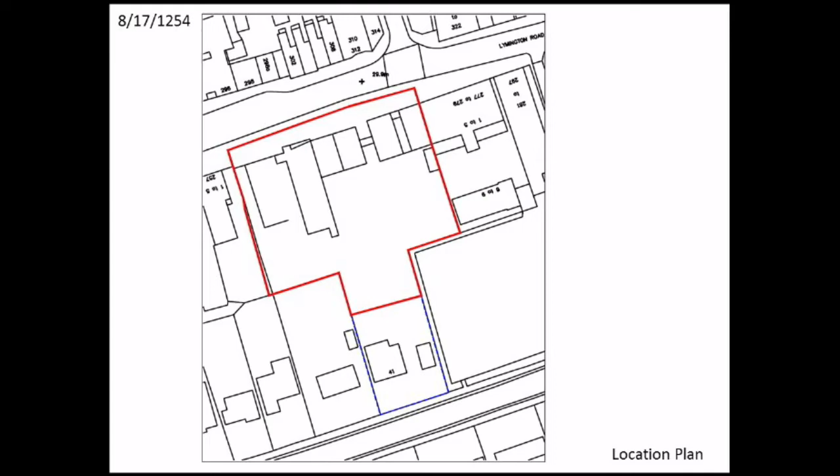To move on to the first item, this is an application for the redevelopment of this site on Lymington Road. Members who served on the committee before will be familiar with the site, as you've previously approved a scheme for its redevelopment before. You'll see the red line site there, with the northern part fronting onto Lymington Road and extending back to the rear of the property on Wortley Road.

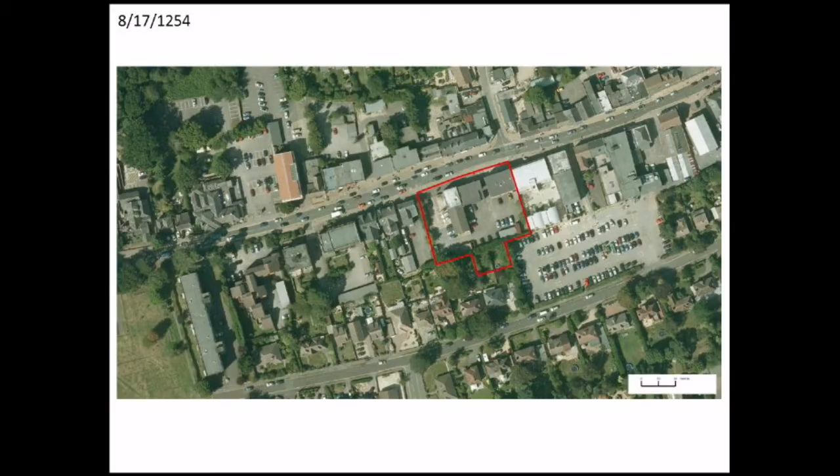The site lies in an area designated as primary retail shopping frontage in your adopted local plan, and just for your benefit, we've identified the area of the secondary shopping frontage further to the east.

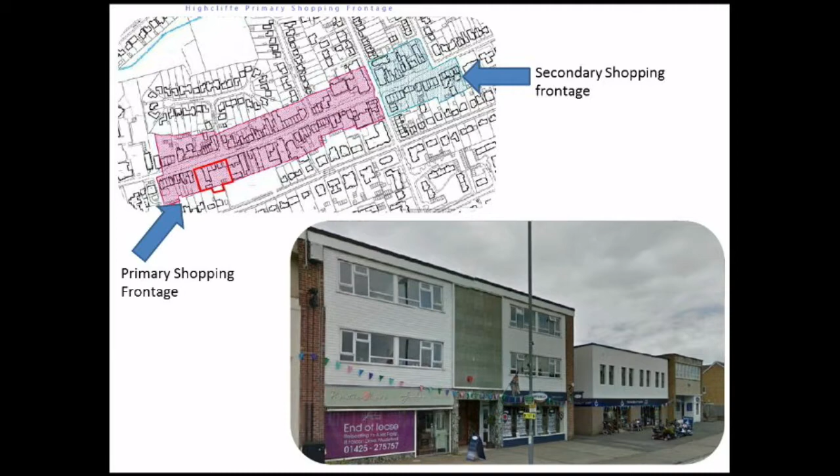These are surveys of the existing buildings on the site, and as I described at the start of the presentation, there's already a planning permission for the site. It includes development of 4 houses as part of that, this terrace of 3 units and a further detached unit that you're about to see.

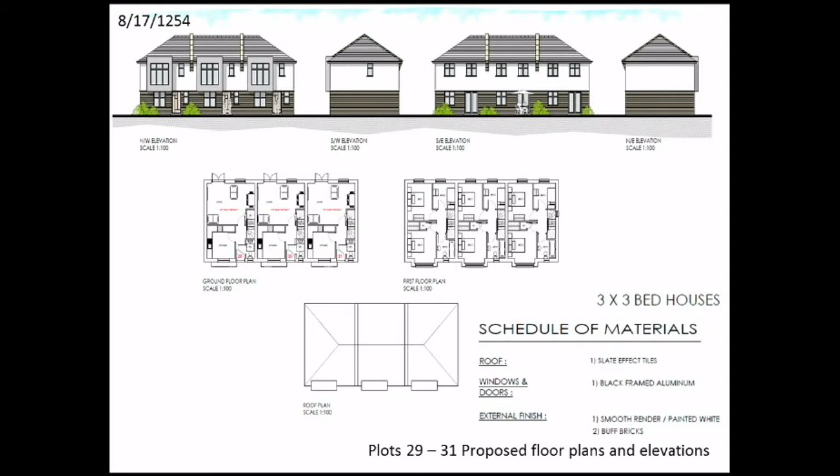This is the proposed layout. The layout is only marginally different from the approved layout. I'll show you the changes in a minute.

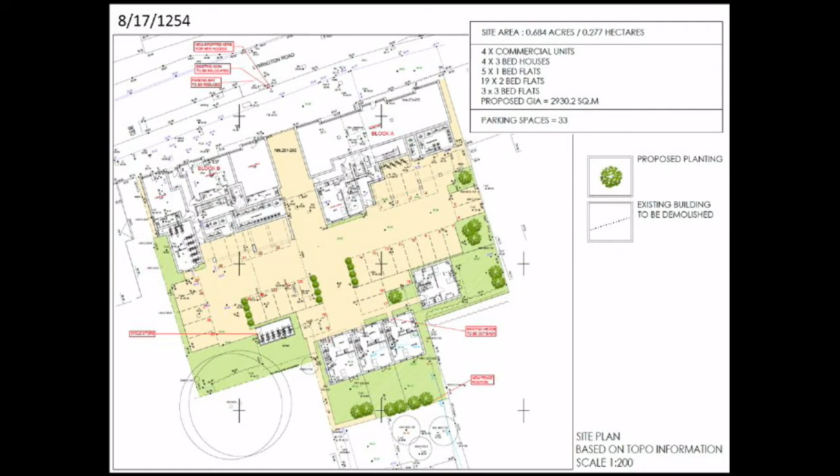In effect, what you can see are the main proposals for 2 blocks fronting Lymington Road with an access in the middle, with retail and flexible uses on the ground floor proposed and the residential uses above. And then at the south of the site, the proposed houses. The remainder of the site is given over to soft landscaping and car parking, with the bin and cycle stores that you can see on that layout.

This is just to show you the differences in layout between the two. They're largely the same. The main differences are in the southwest corner, bottom left, where you would have slightly less soft landscaping to accommodate the additional car parking as part of this scheme to serve the increased number of units proposed.

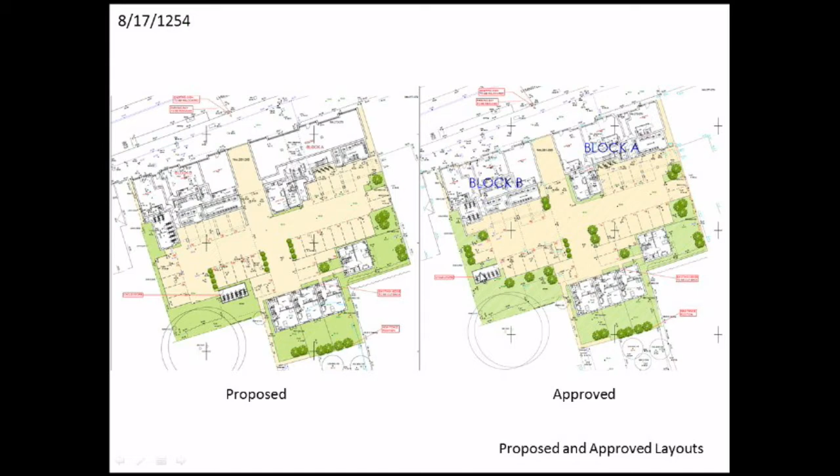Oh, excellent, thank you, help me to point.

So this is the proposed elevations as viewed from the Lymington Road. This is the main street scene, and you'll see how the development steps up into the centre of the site with the central access in between here.

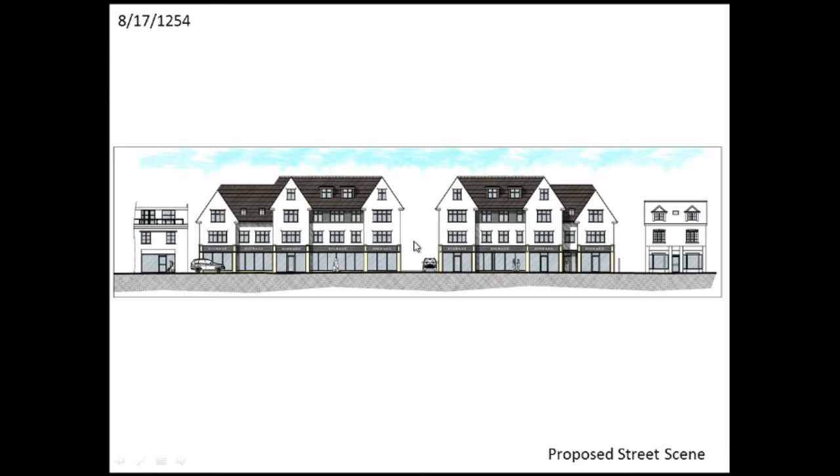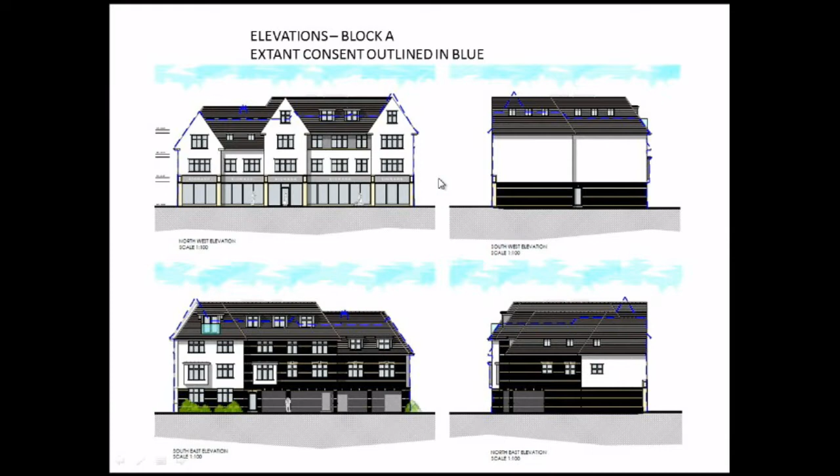On this plan, what we're showing you is the difference in the increase in scale. So the blue line that James is helpfully pointing to, that's the outline of the existing approval, and above that is the increased height of the building to accommodate the additional units proposed in this particular scheme. You can see that relates mainly to the centre of the buildings, but also includes additional height on the far ends.

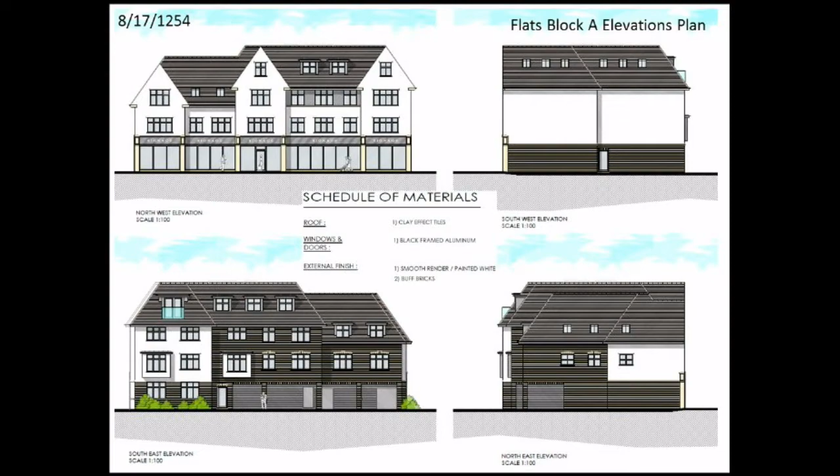In terms of the schedule of materials, this is similar to before, as you see listed there. These are the elevations you've seen in greater detail compared against the approved scheme shown here, and again with block B, what you're considering now against the existing approval.

This is your floor plan. The main difference with the scheme in relation to here is the proposal to turn this from 3 individual units to a single unit, and also the applicant seeking a flexible permission in this case for A1 retail, A2 financial professional services, and A3 cafe use in this larger unit.

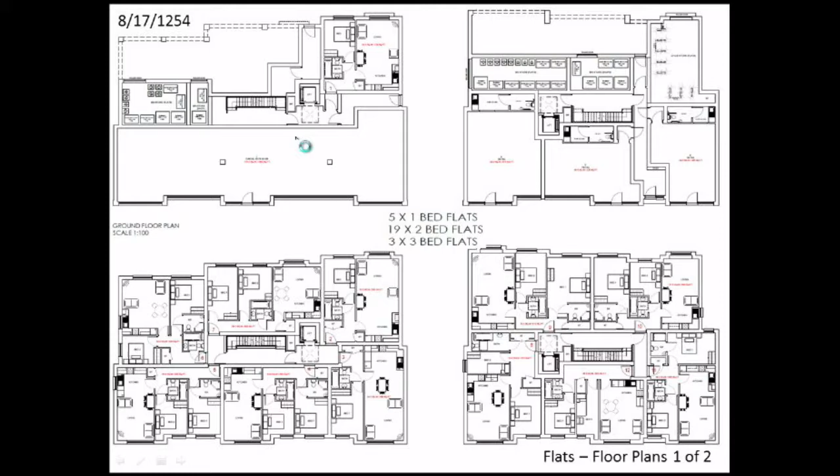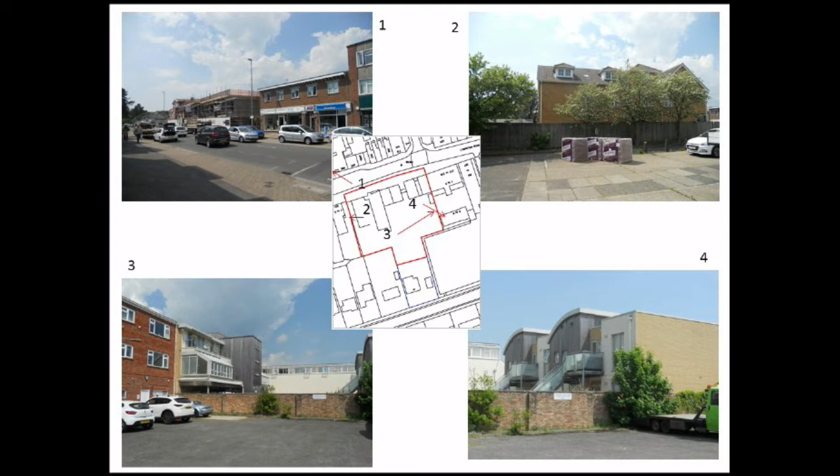Here's your layout further up, so you can see the flats arranged on the various floors and up to the 3rd floor level in the higher part of the building in the centre of the site. So taking you to some views, this is the view with your back to the site, with the new development under construction opposite.

View 2 is from an existing block of flats which has a view into the site from the southeastern end. Southwestern end—this is view 3, looking towards a more modern block that's been built just beyond the car park along the boundary of the site.

Views 3 and 4 show that, and then this is the far end of the site where you can see the existing buildings which project back from Lymington Road, and the large area of hard standing and garages. View 3 shows you the rear boundary towards Wortley Road.

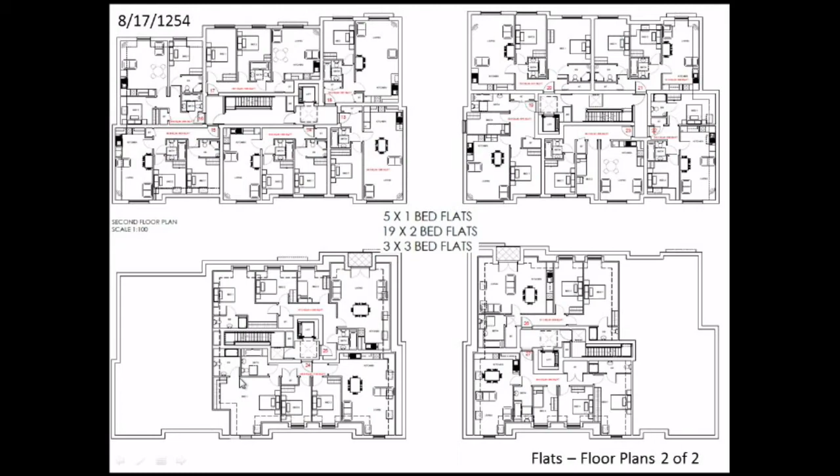You'll see from the report we've given due consideration to the impacts this may have in terms of the street scene and also on neighbours' living conditions. In this instance, we're satisfied that the scheme continues to comply with the relevant development management policies in your local plan, and recommend the application for approval accordingly.

Just as a note on the update sheet, you'll see the recommendation is to delegate to the Head of Planning to approve, subject to completion of a Section 106 agreement. In particular, that agreement concerns inserting an overage clause so that if there is a delay in implementation, the applicants will submit a further viability assessment.

We've accepted, following advice from our viability assessors, that in this instance the scheme isn't sufficiently viable to deliver the affordable housing. But if there is a delay in implementing the scheme, we've inserted a clause into the legal agreement so we can revisit that.

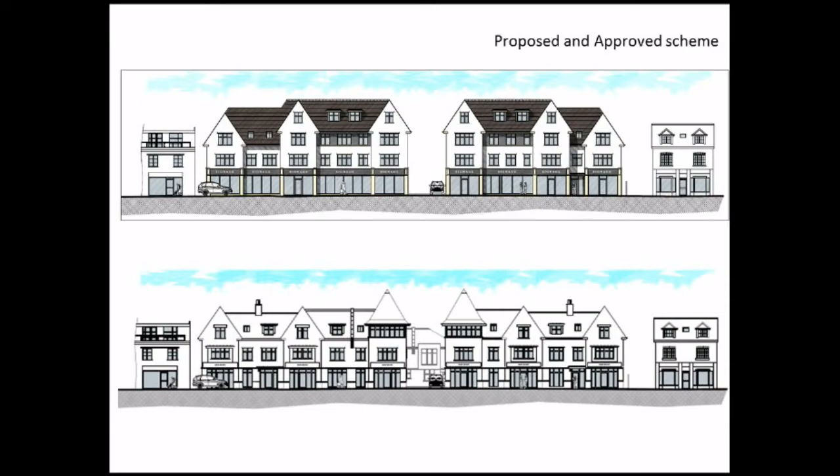So, Chair, the recommendation is as on the report: to delegate to the Head of Planning to approve, subject to completion of that agreement and the conditions listed in the recommendation, Chair.

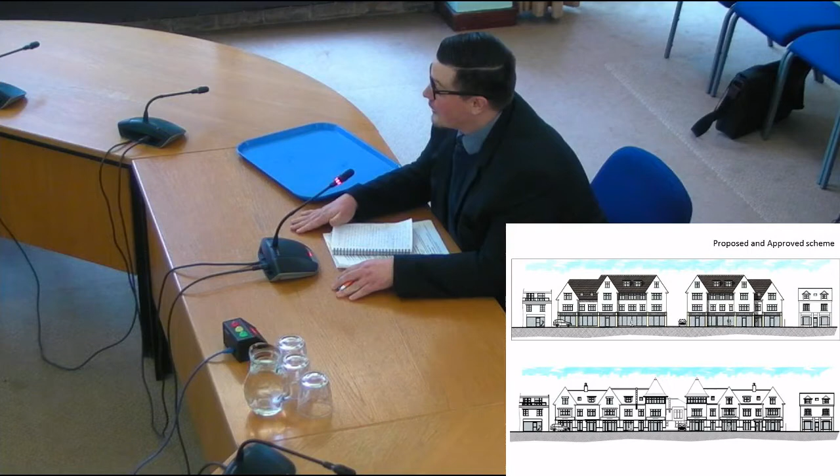My name's Adam Bennett, Town Planning Consultant at Ken Parke Planning Consultants, and I represent the applicant in this matter. The scheme before you today is the result of positive and proactive negotiations between the applicant and officers, with all of the issues here having been resolved at an early stage.

The application has been in a position where officers have been happy with it for some time, but there's been considerable negotiation in respect to the Section 106 agreement, which has delayed this coming before you. The recommendation before you now is to approve, subject to completion of the 106 agreement, which I support.

Members will recall approving the previous application for this site at committee in December 2016. The development now proposed is a subtle revision of this earlier scheme, which increases the number of flatted units to 27 from the approved 23.

The commercial units at ground floor remain, however 3 of those smaller units have been combined into one larger flexible unit. The dwellings at the rear of the site, as Mr. Hodges pointed out, remain exactly the same as per the approved scheme.

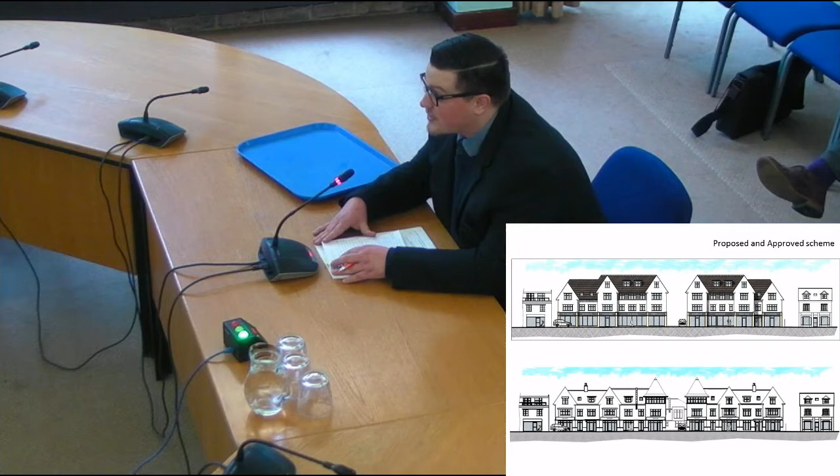To accommodate the additional flatted units, there is a modest increase in the height of both of the street-fronting blocks to 4 storeys. This, however, steps down to 3 storeys at both ends of the site, where it abuts 259 and 277 Lymington Road respectively.

To provide for this additional increase in the number of flats, the on-site parking provision has also increased to 33 spaces from 30, which both your officers and Dorset County Council have confirmed is more than acceptable to meet the needs of this development. Whilst the proposals result in some additional massing within the street scene compared with the earlier approval, the same design ethos remains.

The buildings step up towards the centre of the site, providing a greater vertical emphasis and reducing any sense of horizontal dominance which results from the general width of these buildings. The increase in roof height to accommodate the additional storey is modest, which also helps to mitigate this presence. We consider the scheme to be a visual improvement to the earlier approval, and the development still represents a very high quality addition to the street scene in replacement of the existing rather banal buildings on the site.

Your officers completely agree with this sentiment. There's no change in the separation distances from the neighbouring properties resulting from the additional massing, and the limited number of additional window openings proposed are not considered to give rise to any loss of privacy or harm, as officers have confirmed. There are also no objections or concerns raised by consultees on any of the technical matters here.

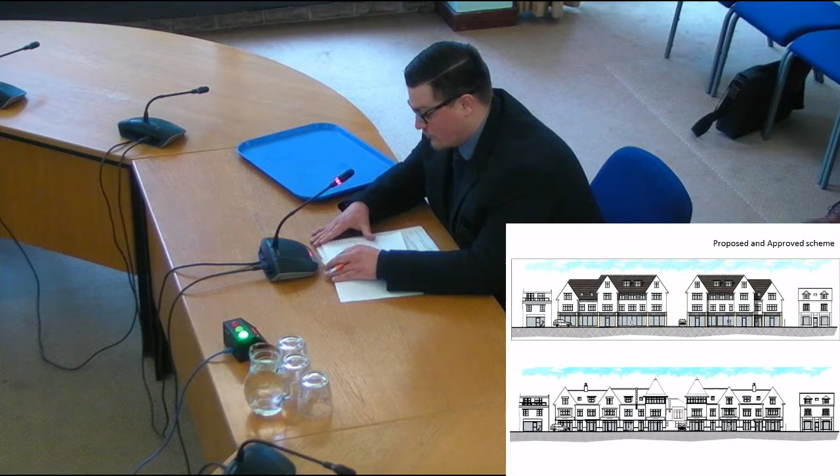The scheme will deliver much needed new housing in a sustainable location and new commercial units which will enhance vitality and viability of the district centre in a high quality, well considered development. We ask therefore you vote in accordance with the recommendation of your officers. Thank you very much.

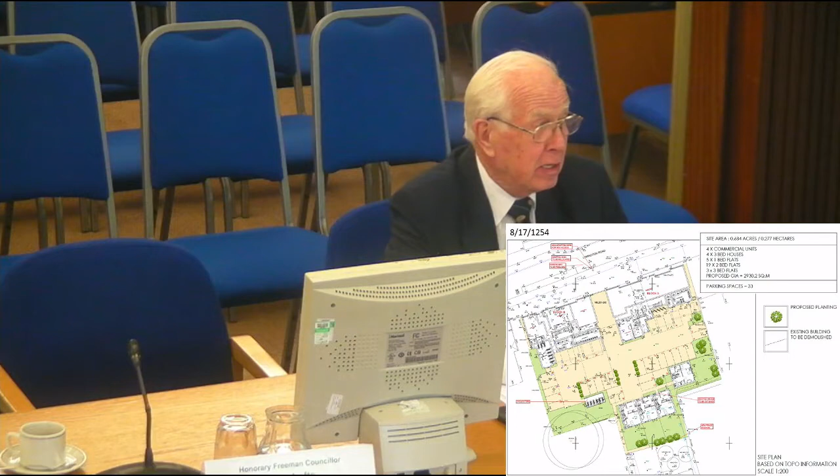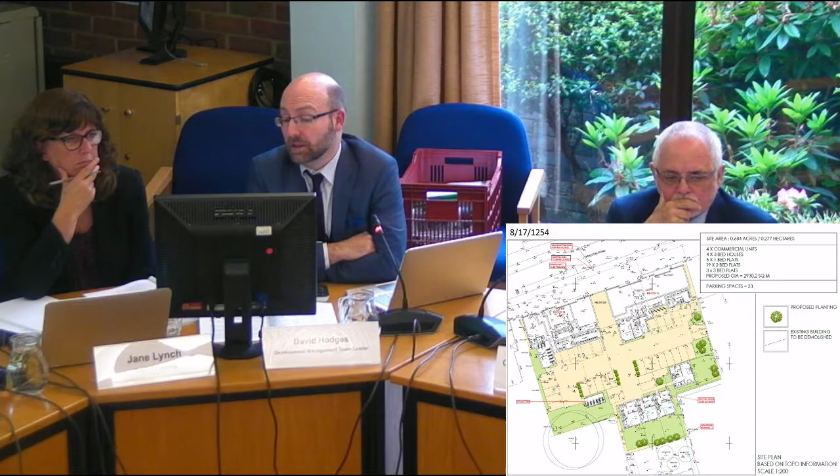Yes, Chair. We've considered that against the criteria in the adopted Dorset parking guidelines, and also taken advice from the Highways Authority. We'd also recognise that this is a very convenient and sustainable location in the middle of Highcliffe. In the absence of any concerns raised by the Highways Authority, we would recommend that that parking level is acceptable, Chair.

Councillor Spittle. Thank you, Madam Chairman. I see actually that the new scheme is proposing 4 stories, including the ground floor, whereas it was my memory that I thought we only had a 3 story limit. Could you explain how the 4th story is being recommended?

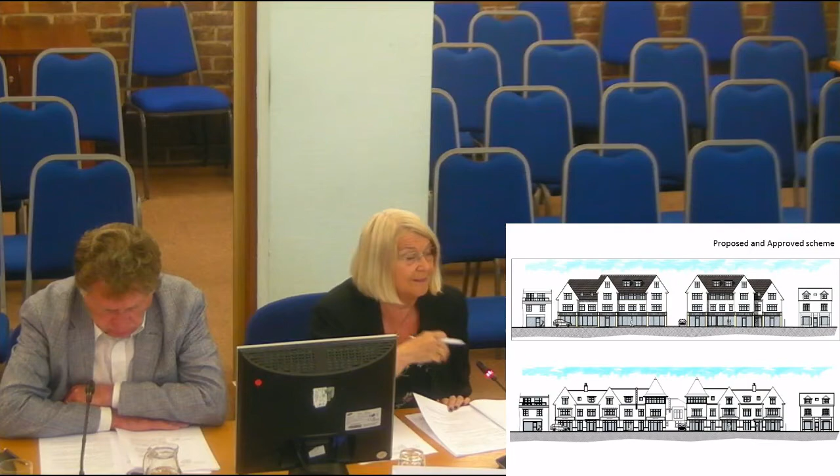Chair, it's important to consider these applications on their merits and whether the impacts of the increased height are compatible with that broader street scene along the Lymington Road. We've given due thought to that, and we don't have a policy which rules that out, so we have to consider it on its merits. We've looked at the comparison between the actual overall increase in height, which is fairly limited when you look at the two together. The other issue is that the 4th storey is mostly within the roof space, so it reads as a 3 to 3.5 storey scale. We've looked at that within the context of the quite tall buildings surrounding it. We don't feel that's so out of keeping, so out of character, that it's detrimental or harmful to the street scene on Lymington Road, Chair.

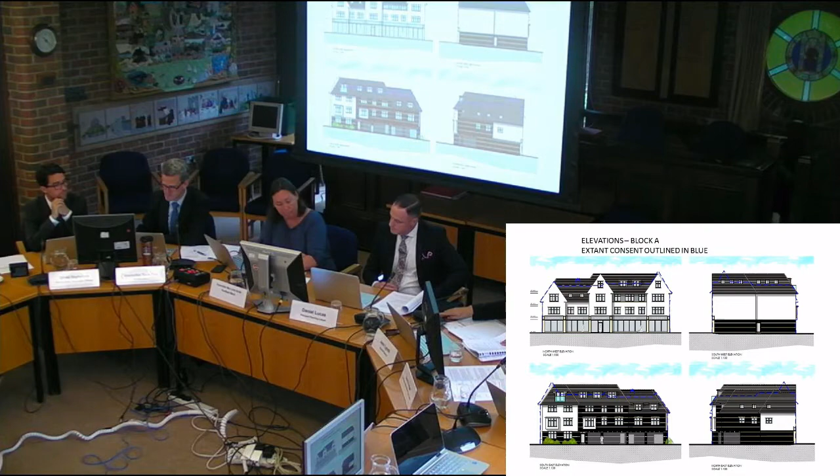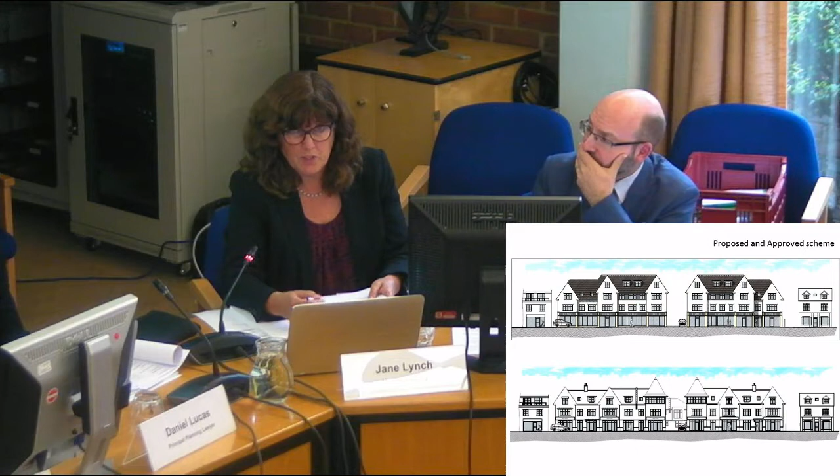If I could just add to that, the National Planning Policy Framework at paragraph 58 also advises that we need to optimise the potential of the site to accommodate development. In terms of any concerns members may have about how this fits in the street scene, paragraph 65 states that local planning authorities should not refuse planning permission for buildings which promote high levels of sustainability because of concerns about incompatibility with an existing townscape if those concerns have been mitigated by good design. So there is support for a building of this type, which officers have assessed as being acceptable in this location.

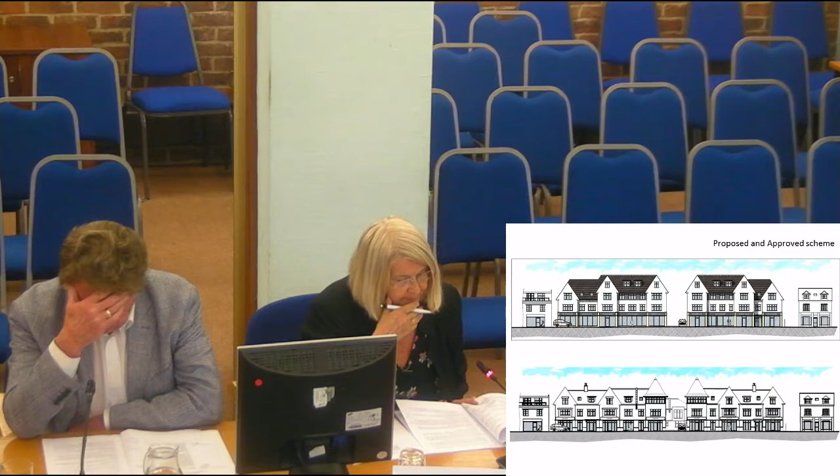Did you want to come back on that? Yes. Thank you for that information. Whilst I accept what you're saying, are you then saying that there are other properties in the high street that are of a similar height? Or is this only going to be the first? So is it going to be setting a precedent?

I think there's two parts to that. First, in terms of the precedent, each time you get a proposal, you need to consider it on its merits. When you consider the heights and scales of the buildings either side, what you're getting is a gradual step up in the scale of those buildings. We don't feel that's so out of keeping, so harmful, that it warrants refusal of the whole scheme. If you get a proposal elsewhere for a 3 to 4 storey scale development, you'll need to look at that in its context and on its merits. But ultimately, the approval of this isn't the first step to it appearing everywhere along that particular stretch. It's the wide frontage of that site that allows some scope to go up in height, we feel, in this particular instance.

Sorry to dominate the scene.

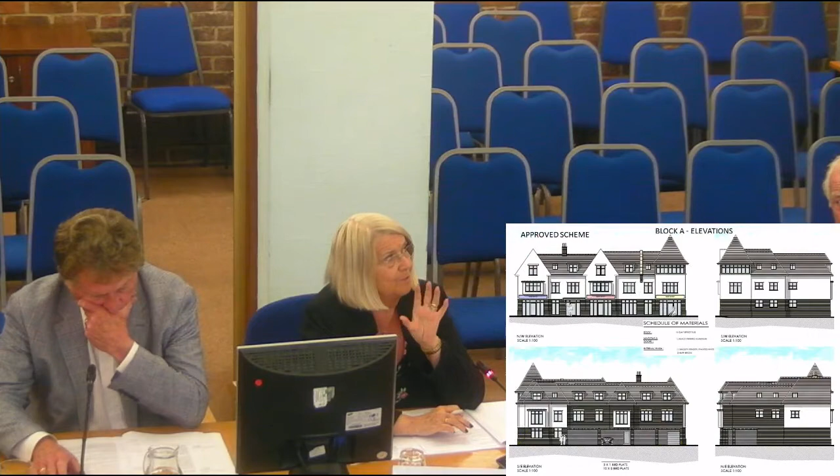So, bearing in mind what you have said, is it possible to have a condition that the additional elevation, which I notice is 2 metres or equivalent to possibly 6.5 feet, would only apply to the high street as opposed to other places within the area? Because there's always been a large amount of concern about retaining just the 3-story limit. Thank you.

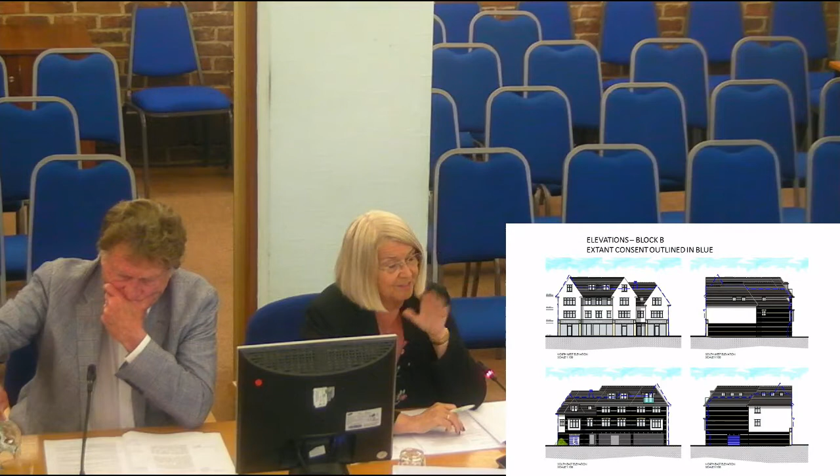Unfortunately, I don't think we can do that. Every application has to be looked at on its own merit, and therefore anything else that came before us with 4 stories, we would be able to make the decision as and when that came before us. We have no policy stating how many stories we will have in that area, and therefore there is nothing to back up that condition.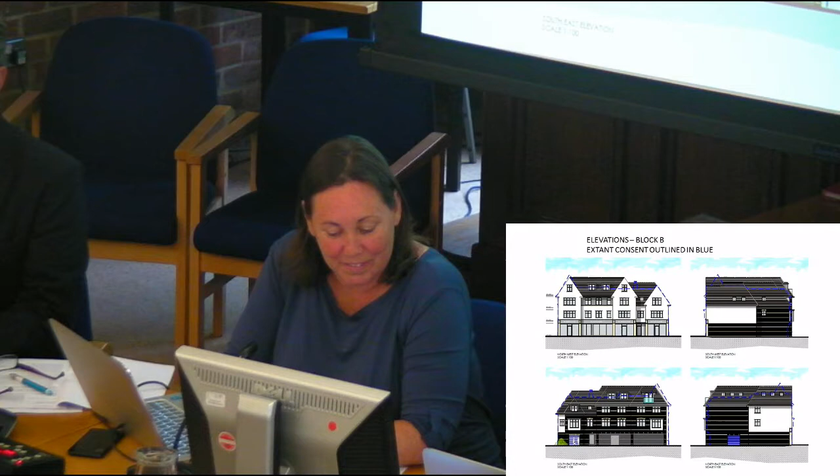Councillor Nottage. Thank you, Mr. Chairman. Can I thank you for the update sheet as well? I noticed this is...

By way of a question for the future: the viability assessment has shown that the development of the site cannot support contribution to provision of affordable housing. I think at some time or other the planning committee should know a little bit more about the assessments that contribute to those decisions. I know that's been verified and agreed by the district valuer, but for my part I'd like to know a little bit more about what does and what does not contribute to affordable housing.

I also note that the condition the applicant has agreed is that if construction doesn't reach a shell and core stage within 2 years of the date, that viability report can be reassessed. Am I right in saying that most of the left-hand side of this building is under construction as we speak?

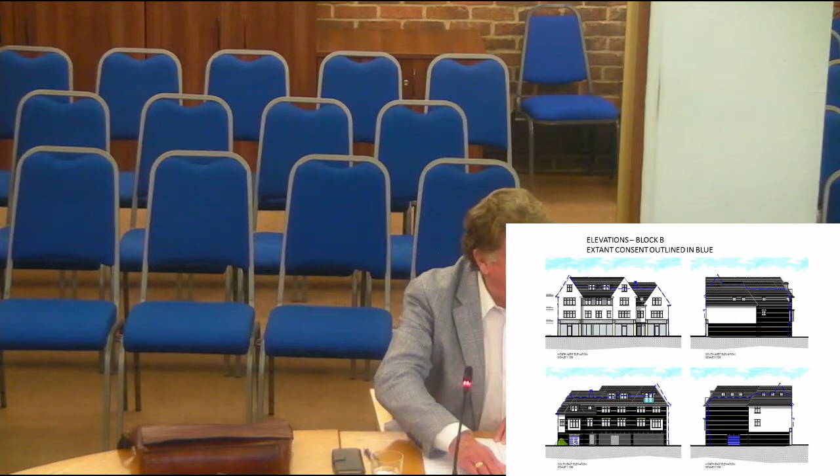No, it isn't. I think you're thinking of the construction on the other side of the road, which is not dissimilar in design. Oh, I see. I apologise. I withdraw my question.

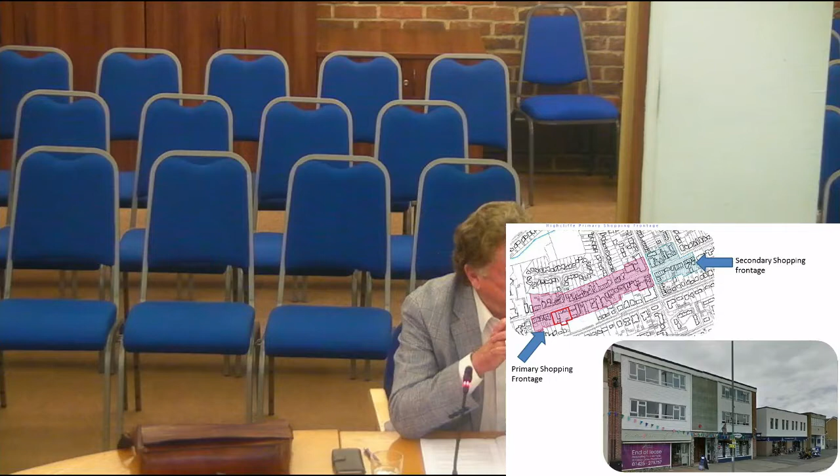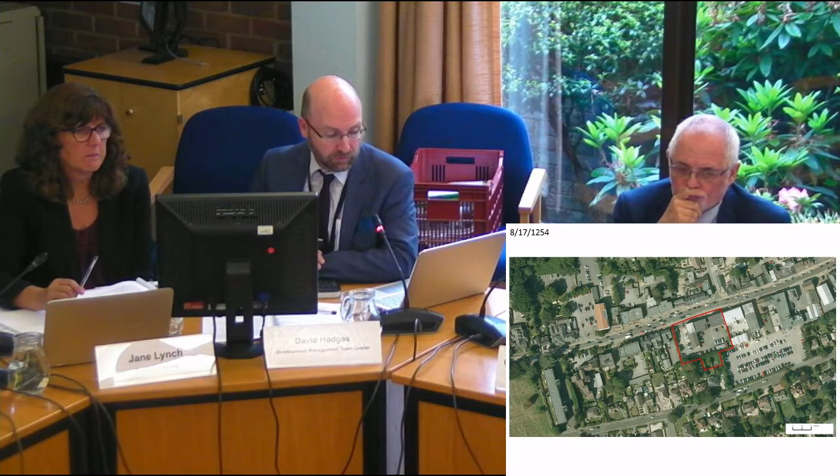Chair, yes, so the question about viability, we set out in some detail in the report the discussions about viability. Our understanding is the government, as part of the proposals of changes to the NPPF and the government white paper, is looking at establishing some principles for the publicity of information in relation to viability assessments and how they should be carried out. We're waiting in the summer for the government to publish those, when they're actually going to set out on a very clear footing how they should be considered, the information that council should publish.

For the purposes of this information, we receive a report from the developer stating they're concerned about the viability of the scheme. We give that to the district valuer as an independent assessment, so we've got an independent view of the veracity of the information we're being given. We're satisfied with the information from the DV as a reliable interrogation of that case by the applicant, such that we have confidence in it, and we can say to you we have confidence in the DV's assessment. So if the district valuer says there isn't a case to argue over viability, we would relay that as our position and recommend that you have confidence in that assessment from the DV as well.

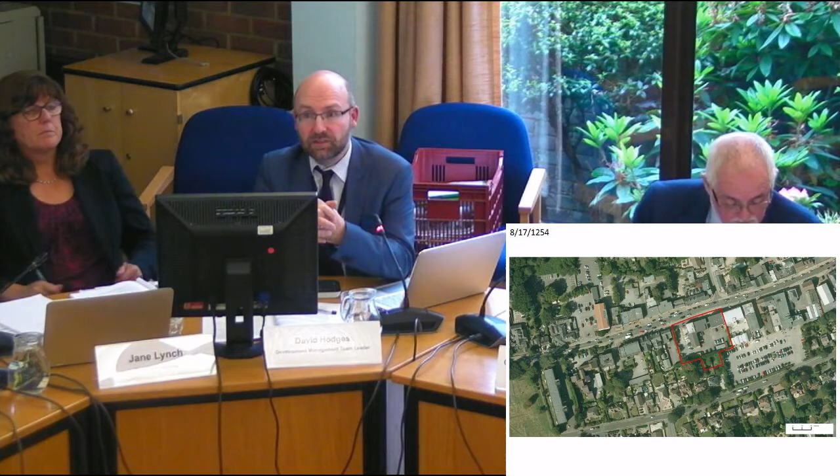In terms of the information submitted, whether you're being allowed to view that will depend on whether there's any commercially sensitive information within that submission. Does that help?

Well, thank you for that. I suppose the question I would ask is just how far would you go in allowing us to understand the principle of affordable housing, which is quite crucial to our plans as far as the council is concerned?

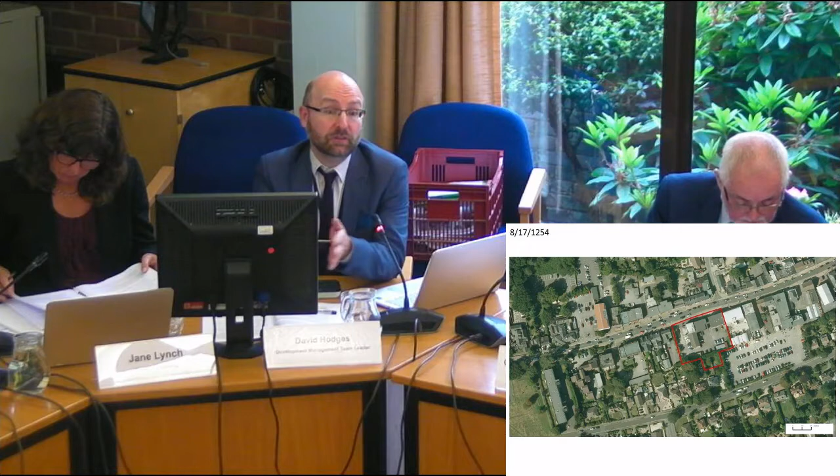Yeah, Chair. I mean, we've got a policy. We're trying to deliver affordable housing as part of that policy, and we don't give up that easily. But we are constrained by the way the system is currently set up, where if the applicant puts forward the necessary information that is accepted by our independent assessor to show the scheme isn't viable, we don't have much ground to resist the scheme for not providing affordable housing, because in effect we'd be fighting an appeal case we couldn't win. So we don't want to do that.

What's important to us is to interrogate those developments to find out whether they are sufficiently viable to deliver affordable housing. Some will, and unfortunately some won't, as the system is set up currently. This is one of the ones in which, after the district valuers looked at all that information in relation to the cost of the development, the likely return to a reasonable investor, and the likely sale and rental values of the commercial unit, their conclusion in this particular instance is it's not sufficiently viable. We don't want to be in that position each time, but if that's presented to us as fact, and it's accepted by the independent assessor, then we would have to accept that as overwhelming evidence that in this instance it can't provide affordable housing.

Did you want to come in? Oh, apologies, yes, just to add in terms of what the policy states. The policy states at LN3 that any planning application which on financial viability grounds proposes a lower level of affordable housing than required by the policy percentage requirement, which is 40%, must be accompanied by clear and robust evidence that will be subject to verification. So they've given us the robust evidence, and we've gone to verification by using the district valuer. In this instance, it's a case that complies with that policy still because we've tested whether it's sufficiently viable or not. I hope that makes sense.

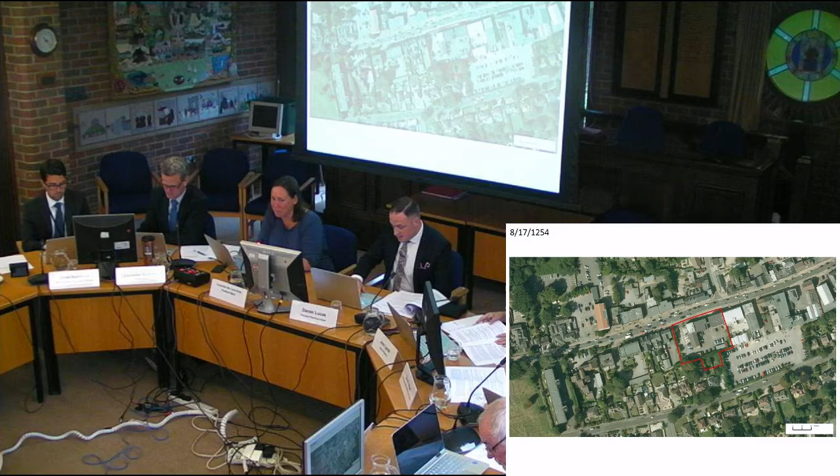I have a question. The larger retail unit, is there an end user for that at the moment? Because it is quite a large unit. We've not been advised of that. That's not our role as the planning authority to say either way who should go in there. What we're doing is considering it in the wider scope of the vitality and viability of the high street there, in terms of whether allowing that A1, A2 or A3 use would then contribute to the vitality and viability of the high street of Lymington Road at that point. So that's our concern. We've not been advised of an end user.

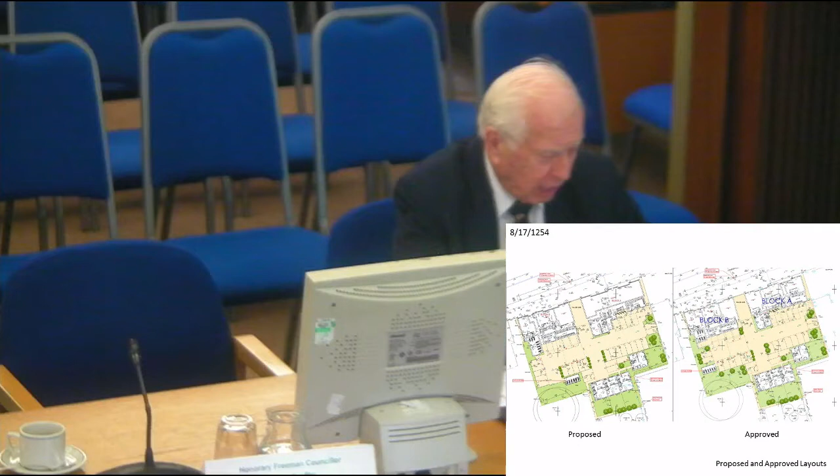Councillor Hall: Very much, Madam Chairman. I think Councillor Notch has made a very valuable point. It's all very well saying we need affordable housing, but there's a lot of difference between social housing and affordable housing. Affordable, I understand, is only 80% of the market value, which, in my opinion, is very high. Would you agree with that?

We can't really agree with it because affordable housing is just an alternative term for social housing. The split that we have is between socially rented and shared ownership. You're right about the discounted values, but I don't think this is the place to get into the values of those. We have a policy which, if affordable housing was applicable on this site, we would be applying, and we would be reporting to you how the offer sat against our policy requirements. But affordable and social housing is the same thing.

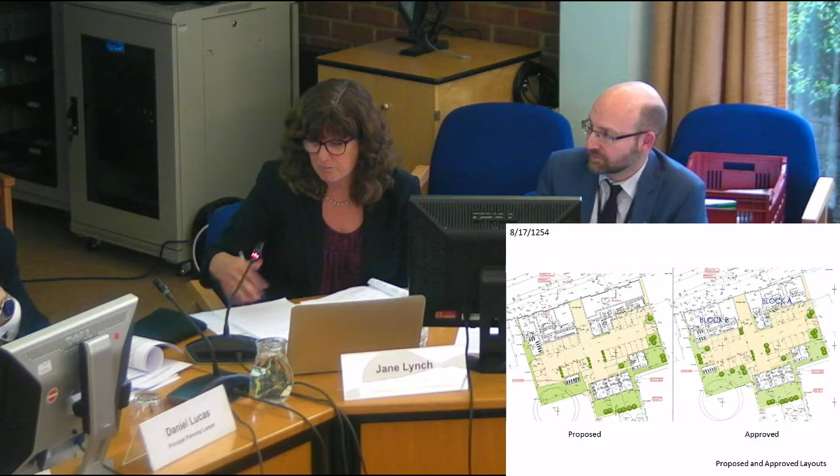Any further questions? Councillor Neale: Yes, point 7.6, the trees. There's a contradiction in some of the comments there about the benefit of the screening to the flats behind. I don't see in the conditions that you've actually put in a condition about replanting any of the trees that you remove.

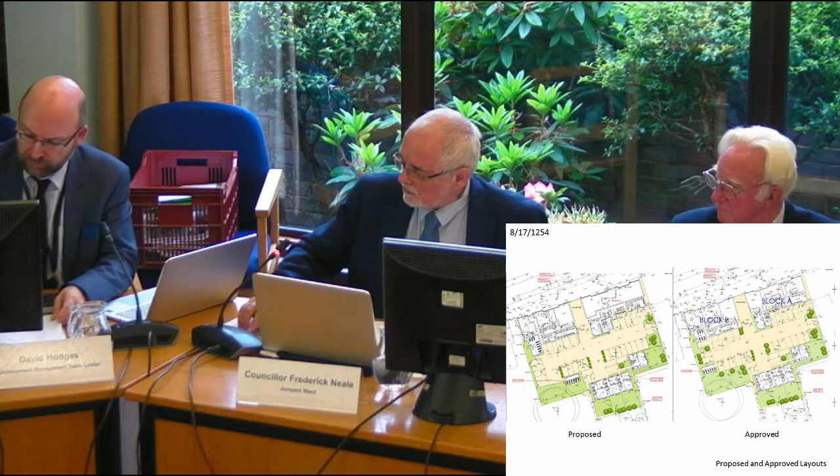Chair, bear with me one second. So at condition... Chair, that's correct, and if members were sufficiently concerned about that, we would be content to add a landscaping scheme just to ensure the quality of the scheme reflected the layout you see before you on the screen. I think if you follow it down, points T1, T5, you carry on saying there's a negative impact to the flats behind, so I would like some screening put in as a condition. I think at condition number 11, it actually talks about protecting the trees and their rooting environments once groundwork starts, so maybe we could look at extending that to cover all of the landscape.

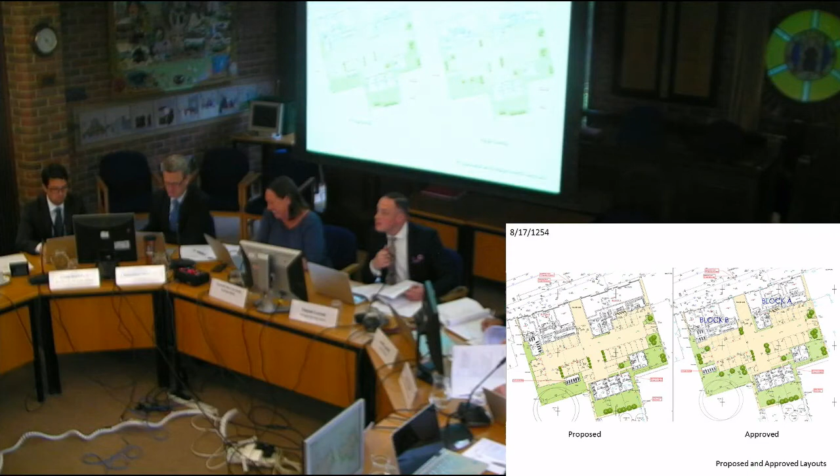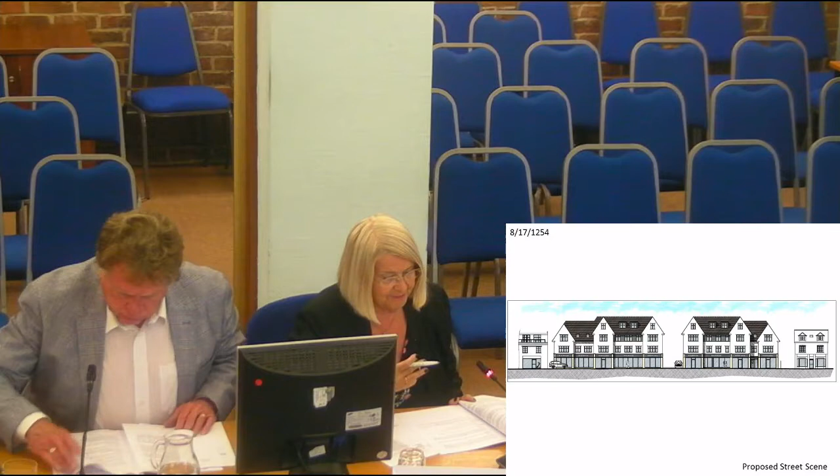Any further questions? Councillor Spittle: I'm sorry to come back about the height again. Well, I'm not really, but I was just apologising to appear nice. I see on one of the conditions, number 15, that you have referred to the general permitted development order, but as I read it, that only seems to be related to retail use. Am I right? Or does it also mean that permitted development rights are going to be removed for the development of the properties that will be inhabited, not the commercial use?

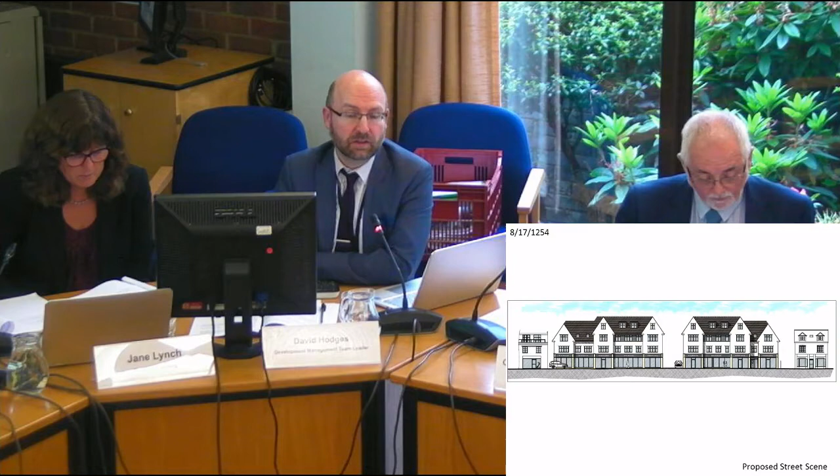Chair, yes, if I can help explain. Condition 15 is only concerned with the use of the retail unit. The reason for condition 15 is we want to retain those uses in A1 retail. Under the permitted development regulations, they can be changed to other A uses without needing planning permission. So we want to retain the retail benefit.

There aren't any further conditions relating to removal of PD rights because these are flats and they don't benefit from any PD rights. So in effect, they can't extend or insert any further windows into the block.

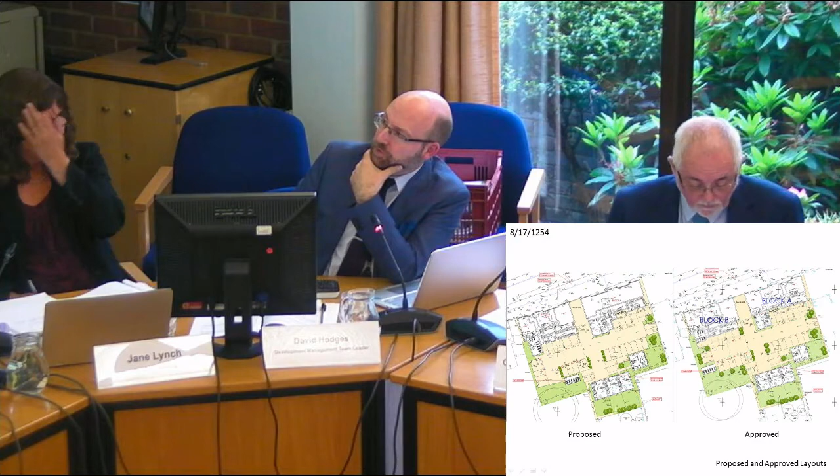In terms of the houses at the back, you could consider that, but I don't think there would be an overriding reason to remove the permitted development rights for these houses, due to the fact that they've got reasonable grounds and gardens, and we don't necessarily want to be dealing with applications for sheds at these properties when they could just put them up as permitted development. Also, our experience is that inspectors take a very dim view of us uniformly removing permitted development rights where there isn't an overriding need to do so.

So the flats here can't alter without coming back to us. We considered whether we should restrict those rights to add outbuildings or alterations, but we feel in this particular instance there's not an overriding reason to remove their PD rights, Chair.

Are you happy with that, Councillor Spittle? No.

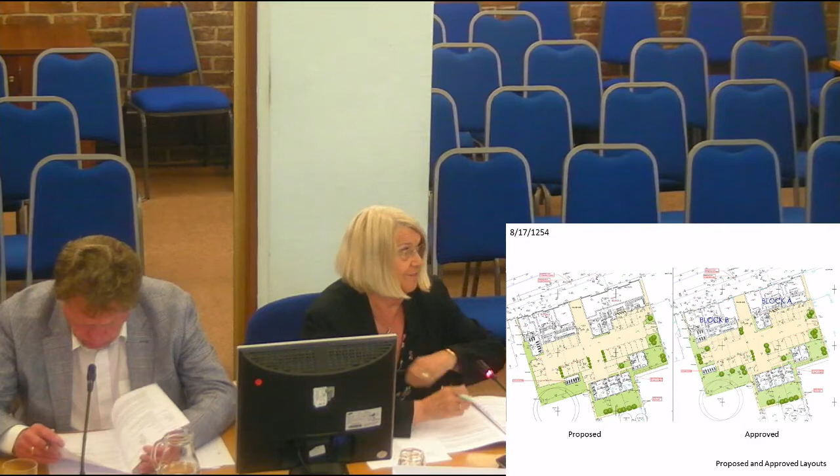Could we see, please, the plans for the houses, just to satisfy myself how many? So they're only going to be two. Yeah, no, in fact that satisfies me. Actually, I was afraid they were going to be of the same height as the shops and the frontage. Thank you, and I should have looked at that a little bit more closely.

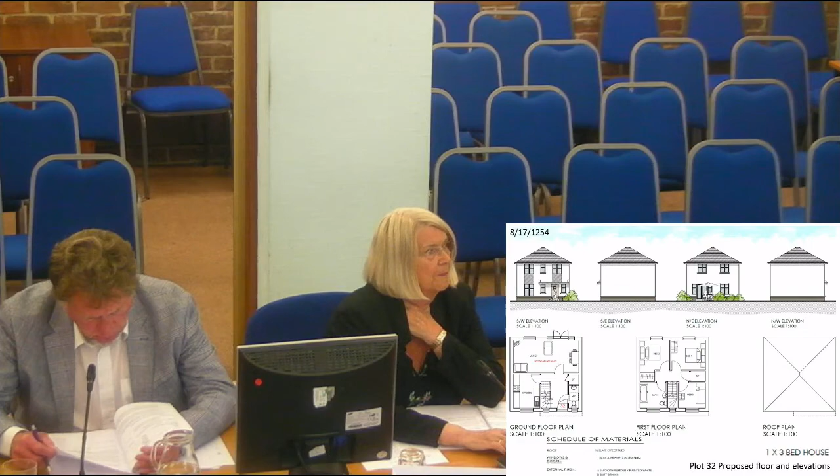Thank you. Do we have any further questions before we go into debate? In that case, we shall go into debate. And who would like to start me off? Vice Chairman?

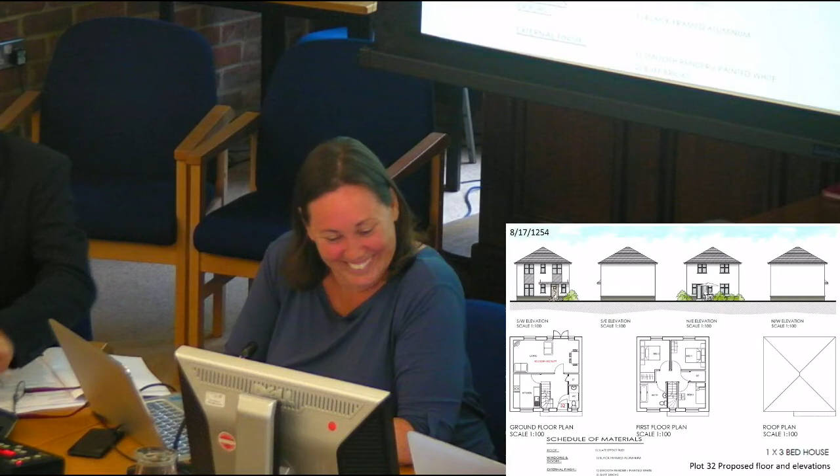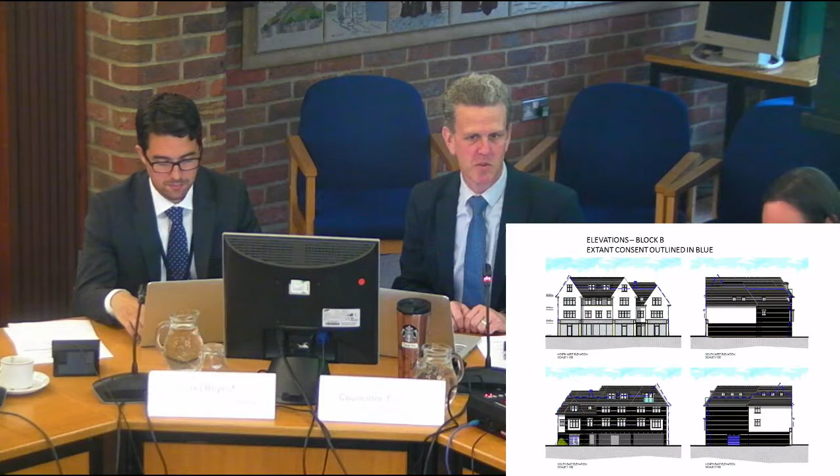Thank you, too kind. Okay, as the design champion hat comes with the job of Vice Chairman, I just want to say that I do remember the previous development coming through to us, and I remember thinking that I quite liked the design, and I have to say that I find the new design to be not quite so appealing.

However, that said, we don't have any reasons that I can see that we could turn this down. So I'm happy to propose, as set out with the recommendation there, to extend condition 11 to include the screening. Okay, do I have a seconder for that?

Councillor Grace: I'm happy to second this. I also agree with Councillor Fox, I prefer the first design of these buildings, but as we have no planning reasons to refuse, I will second.

Do we have any further debate? Councillor Hall: Thank you, Madam Chairman. Well, unfortunately, I can't support this because I think it is overdevelopment. I think the height, the bulk, despite what the officer says, I do think it will set a precedent. It's a very narrow high street.

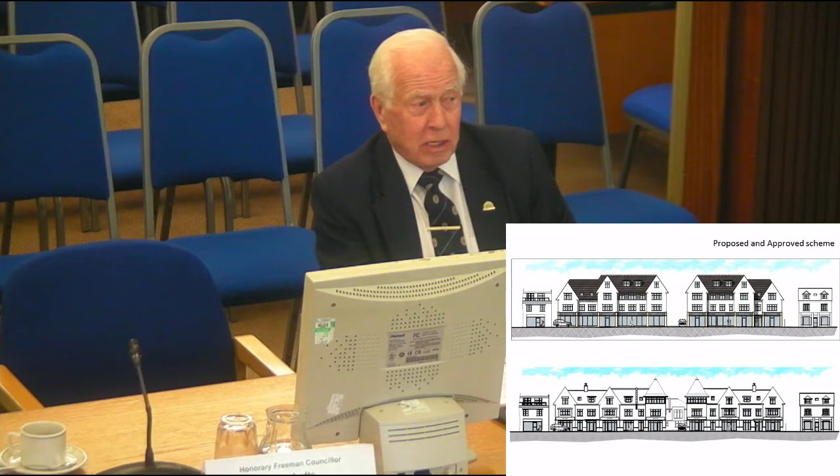It's going to alter the character of Lymington Road altogether. On the previous application, I didn't like those two big belvederes. They've gone, which is an improvement. But I do feel that we are setting a precedent for the rest of Highcliffe. So, unfortunately, Madam Chairman, I will not be able to support this application.

Councillor Spittle: Thank you. It'll come as no surprise that I'm unhappy about the application. Simply, as the previous speaker has said, it is the height and the bulk, and it's not such an appealing architecturally designed property as we saw before. So I cannot support it.

Do I have any further speakers in the debate? Councillor Nottage: I sympathise with the points that have just been made by the two councillors. However, without a shadow of doubt, one of the issues we have as far as our high streets, which are changing so fast in front of our eyes, is the fact that we do need population in them. Whilst I have got considerable reserve about the change in design, especially the presentation of the new large shop, I will support it because I feel that increase in population and those flats are going to be very valuable to that part of the high street. Thank you.

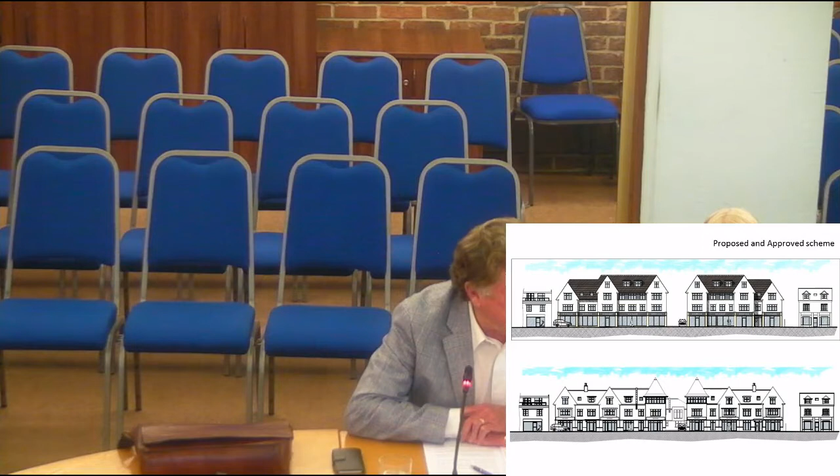Any further comments? In that case, we will go to the votes. All those in favour of approving with the amended condition 11 — I'm afraid you can't speak on that.

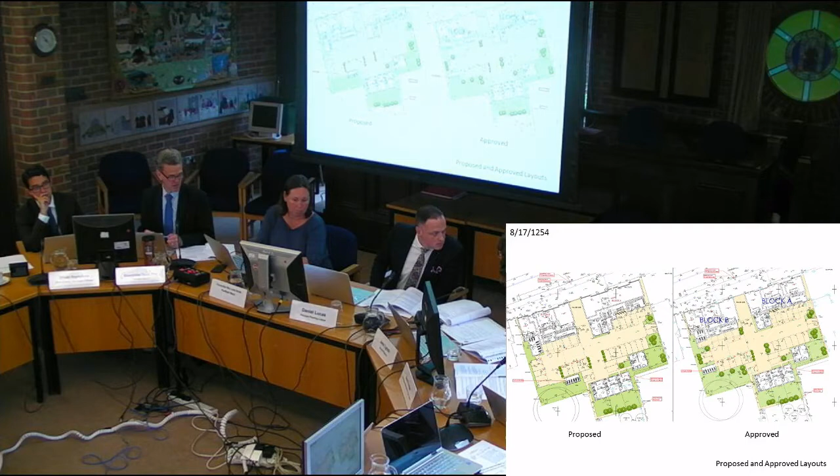Yes Chair, if I can just clarify the point the applicant was trying to make. What the applicant was concerned with is that the trees being protected, as you can see on this plan, are outside of the site, so they're not under their control. So what the applicant was concerned about is that we were making a requirement for them to replant trees that aren't under their control, but they're not taking those trees out, they're simply protecting them during development.

In terms of my understanding of what the committee wanted to achieve, that was to secure the landscaping for the site and initial tree screening. I'm entirely satisfied that's a reasonable position for the council's separate condition to take.

Maybe the best way to deal with it is to have it as condition 17, a landscaping condition, to avoid any confusion. Yeah, I totally agree - let's have it as a separate one, and then we can have the landscaping to be agreed with us prior to works.

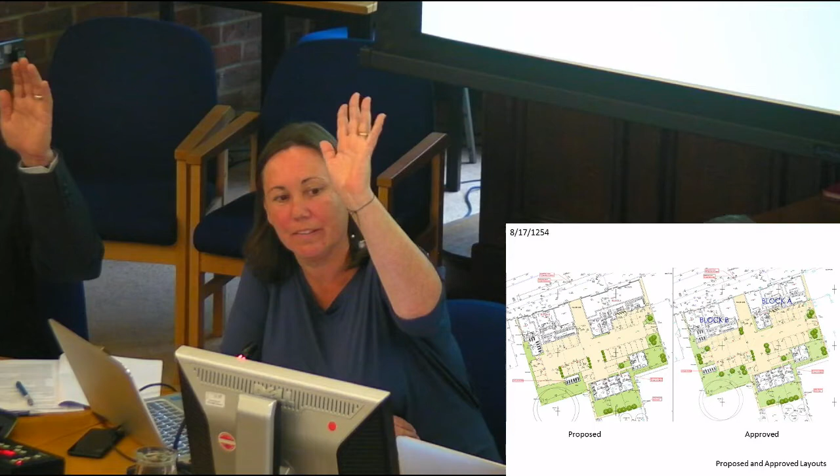So, all those in favour of approval with the now added condition, please show your hands, and I will be voting on this one. All those against? Any abstentions? That application is approved.

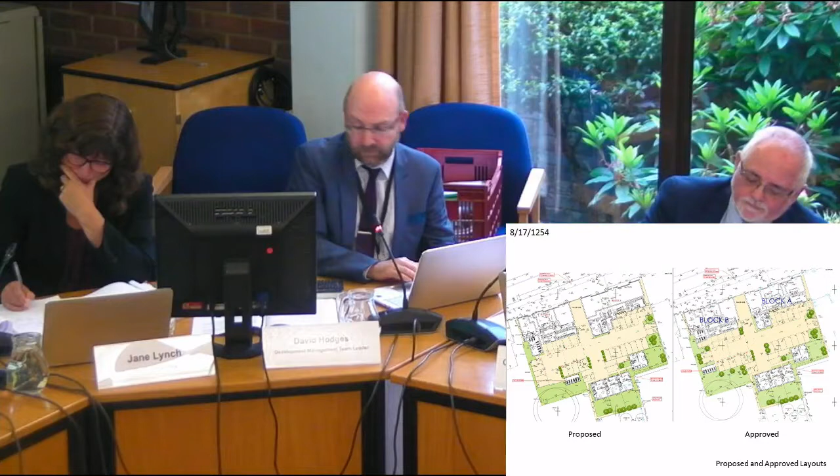I think because he's not sitting on this one, I'm assuming he's gone home because he can't sit on the next one either. So we go on to item 6B, 61 Wortley Road.

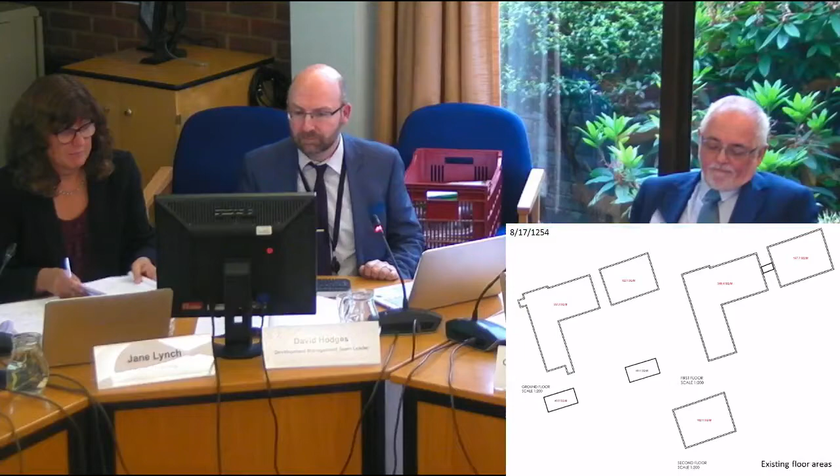Yes Chair. So this application is for the redevelopment of this site at 61 Wortley Road for a pair of semi-detached properties and one detached property. Eventually I'll work out how to use the mouse and get the right way forward.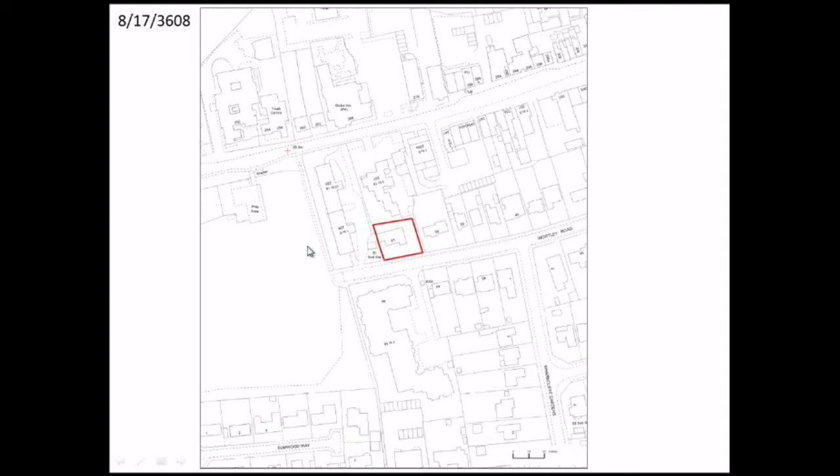It's my first time. Right, so this is the site on Wortley Road. It's currently occupied by a single-storey property and is just to the southwest of the site we've just been discussing. This is the aerial view of the site - there's an existing bungalow, and just to the north is the block of flats at Claire Court. You can see the block of flats at Clare Court, and a more recent development, a McCarthy and Stone development, opposite the site.

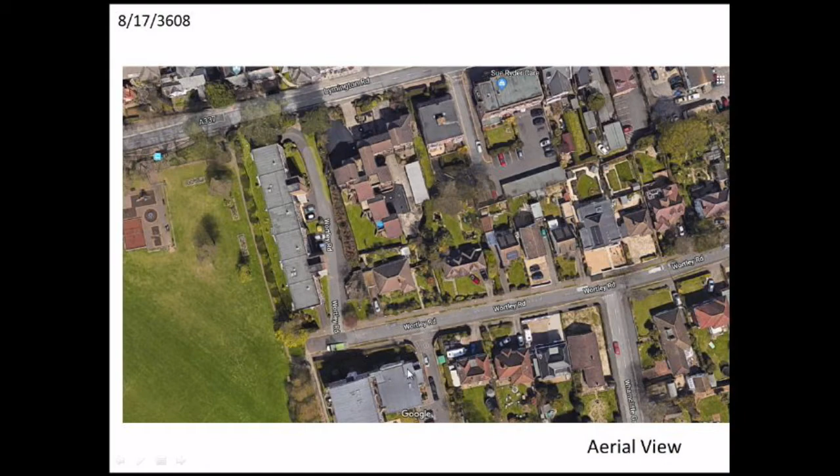Just to show you some views of the existing property - this is stood on Wortley Road looking at the bungalow on the site currently. Shot number 2 is looking at the side of the property across from Clare Court, and number 3 is taken from a footpath which you can just see between the back of Claire Court and Wortley Road, which I understand is a private right-of-way between that block of flats and Wortley Road.

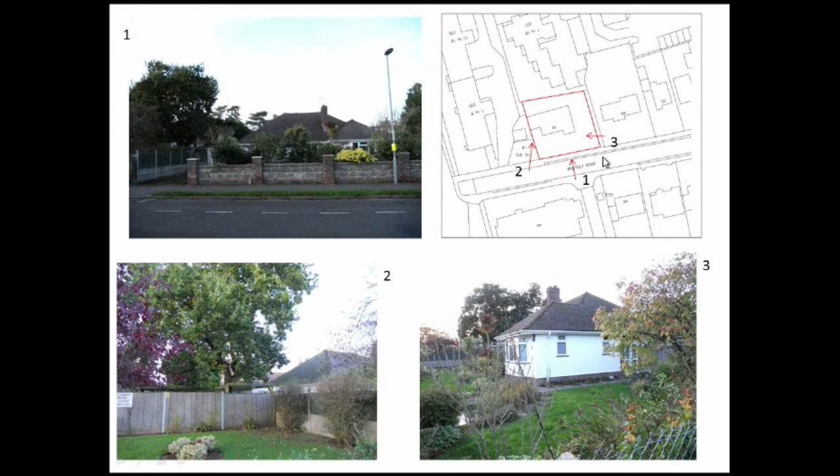What you can see in terms of the dotted lines - the purple is the existing bungalow's footprint, here. The blue line's less helpful - that was a previous scheme which was withdrawn, which we felt was overdevelopment and had unacceptable impacts. But for your reference points for looking at the photos as we go along, that's the existing footprint of the bungalow on the site, and here's the proposed dwellings.

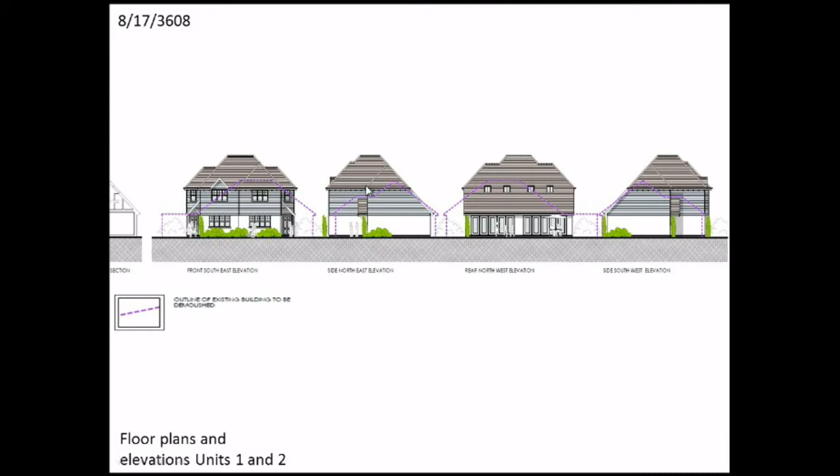Layout of the properties, again, as much as you would expect. For us, the nub of the issue, one of the principal issues we've been considering, is the impact to the nearest property at flat 18 in Claire Court.

Just to help members understand what these photos are showing: if we go to number 1, this is the glazed area, the main living space of that particular flat, on this line here. So when you're in that room, you're looking out in that sort of aspect.

As you can see from photo 2, this is the rear existing boundary of number 61 Wortley Road, with some hedging and the bungalow behind, and then a sizable hedge which separates Claire Court from Clare Court, running along this line here.

Now this window here is a bedroom to the property, on this line along here, with an aspect south looking straight at the fence. Above that, I'll get onto the terrace above that on the next set of photos.

Number 3 is, in effect, set within what would be the communal gardens of the flats here. But just to draw your attention, this is in effect a private amenity space to the occupier of that particular unit.

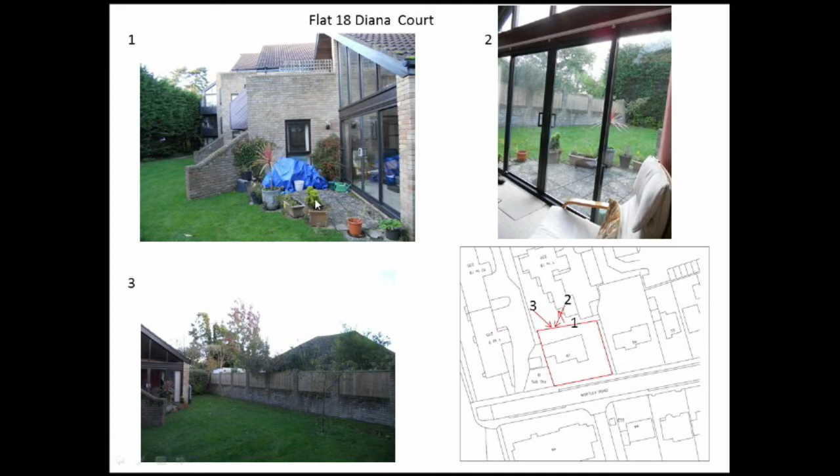Moving on, these are more views from the nearest property affected. Up here is the sitting out terraced area for flat 18, and as you can see, it has a very clear view of the site from that elevated position where the bungalow is at the moment, and where the new properties would go. Behind you can see the larger bulk of the McCarthy and Stone development.

This is from inside the window that you saw earlier, looking straight towards the boundary of the site. And this is from inside, which I understand is a bedroom to flat 18, and then this terraced area, which you can see here.

Just some further views of this property. This is the closest window to the proposed scheme, on this line here on the southern elevation, with a view due south towards the boundary, where there is this hedge separating the hard surface and parking area in this part of the site.

Just to show you how Claire Court extends, and that window, the bottom right, is the view from inside. So that's a secondary window to the lounge area that you see here.

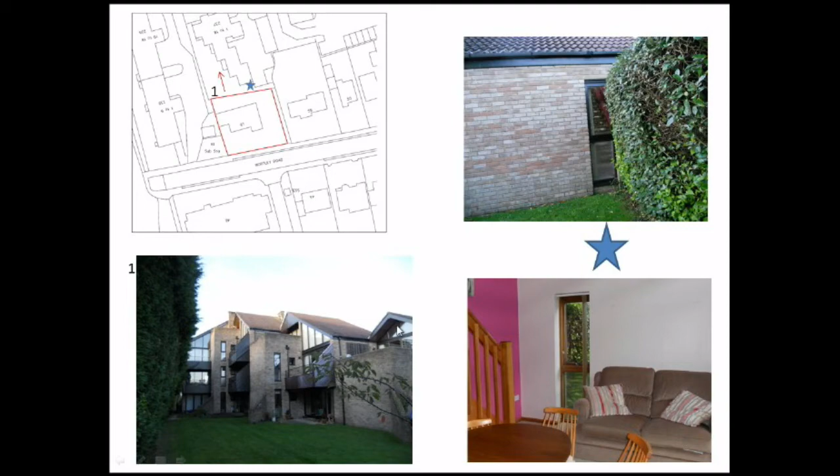And then finally, just to show you this, the terrace of number 18, the upper terrace with its bedroom area there. Final views in terms of trees and layout: protected trees on the west of the site, with the proposed properties in this location here.

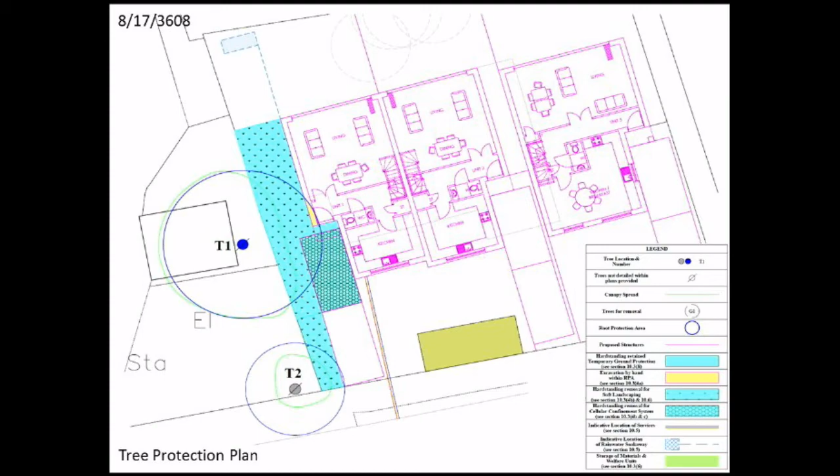Chair, the character of the street has a great deal of variety of development in it. We're satisfied that due to the very varying scale and nature of the properties in the particular street, that it can accommodate an intensification of the site with the pair of semis and the detached property.

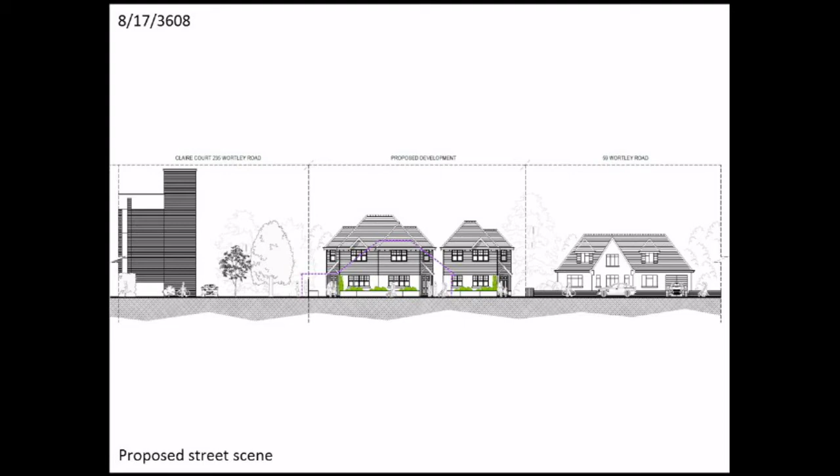The principal issue for us is to minimise the impacts on the adjoining property as part of that. It's inevitable that as the site is developed, there's a change in relationship and a change to the outlook of the neighbouring property. That doesn't make it automatically harmful. It's the degree of that change and the extent of that change on the neighbouring property.

From our perspective, we're satisfied that the applicant has sought to minimise those impacts in terms of privacy or any overbearing impact by its design, the use of the cat slide roofs, the insertion of the roof lights, and also by the siting and the overall heights of the properties.

So we accept there is a change. We accept the neighbour to the north will be able to see the development, but in this instance, having considered all those factors, we're satisfied that the impacts overall are acceptable within the tolerances set out in policy HE2, which asks for development to minimise its impact on residential properties and also be compatible with neighbours' living conditions.

You'll see from the report that in this case we have completed the legal agreement, and so the recommendation is to approve the application subject to the conditions in the report, Chair.

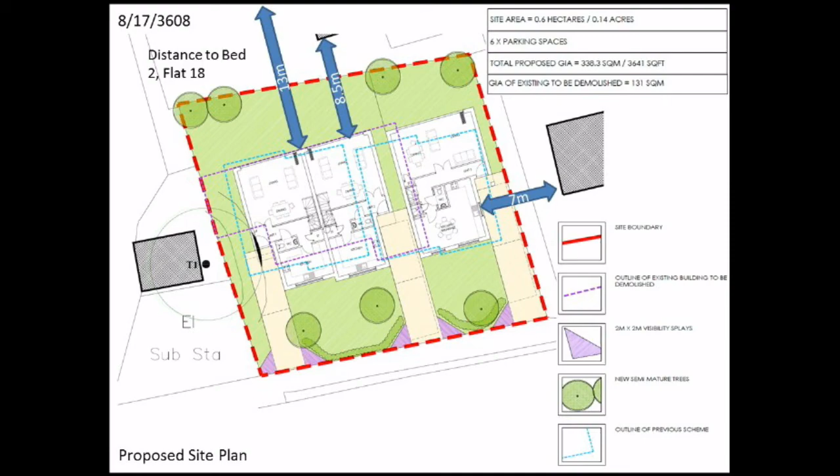Carrie Selwood, I am the occupant of flat number 18, Claire Court.

I've sent in some pictures mainly from the bedroom, the only bedroom window in the property. I support development and believe there is a housing need, but the ridge, if you look at my bedroom window, you can see where it currently is. The original application had a ridge line 2 metres lower, which was withdrawn, and this one's gone back in even higher. So my main concern is basically the height of the building.

Under national planning guidance, it states there should be a 45-degree right of light, which it does pass. But the guidance also says there should be a 35-degree angle clearance to the window from the adjacent building heights, and this does not clear the 35 degrees, it only measures at 25 degrees.

So my point really is for the roof line to come down some, so that permitted development rights for any new owners would not automatically allow them to put a dormer window in and look straight into my bedroom and the rest of my property. If the permitted development rights were withdrawn, that would help keep my privacy.

And with the ridge height, it basically casts my own amenity area into shadow most of the time. If the property was at the north it wouldn't affect as much, but this is due south. Thank you for your time.